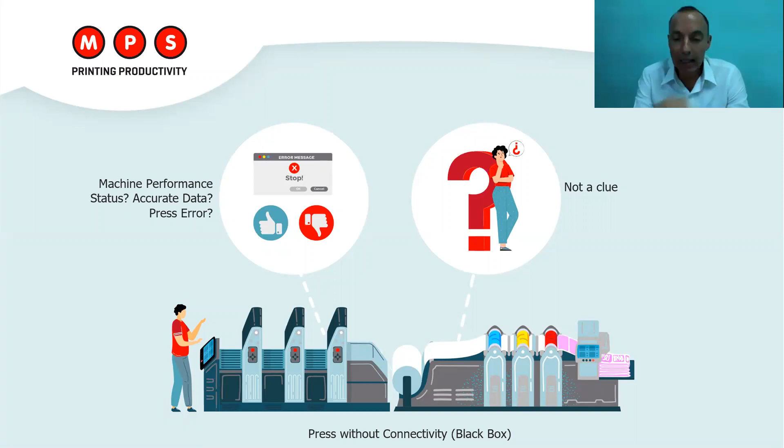So why is that? And it's even more important because for us, we've analyzed many situations and we found out that many machines are not running that well. The utilization rate is rather low. Sometimes the machine is just running for around 30% of the time, meaning 70% of the time they're sometimes not running.

That's huge. If you want to earn back your machine that is worth maybe 1 million euros, of course you want to run that machine continuously. You don't want to have those big breaks in between.

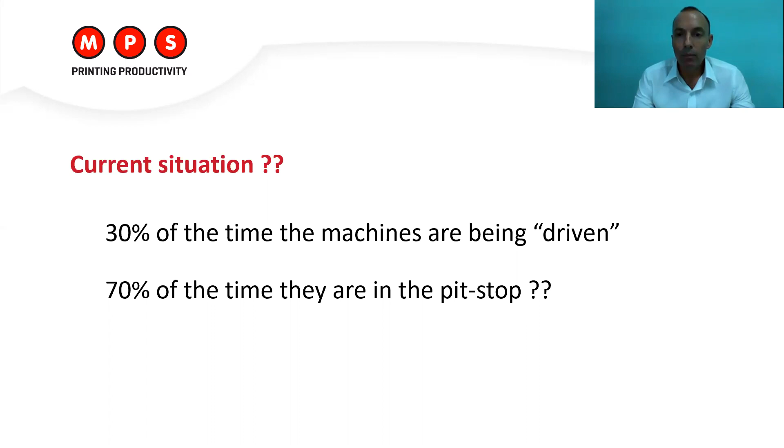So look at a typical sort of period of a machine. After installation, so you have the ramp up, you have all kinds of peaks and valleys, quite a bit of downtime. And what you actually want to have is a more consistent, desired operational bandwidth in which you want to run. So you need to know, why are those downtimes, those valleys here in these graphs?

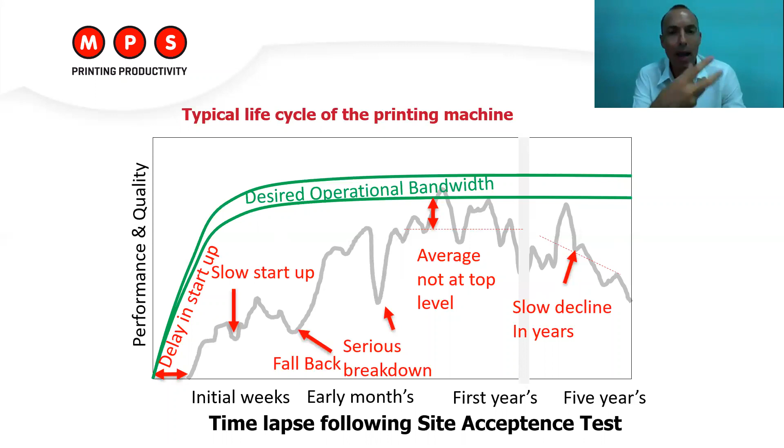What's happening at the moment? You don't have all that data. So if you want to be on par with the Formula One industry, we need to mirror the printing press.

We need to make a digital twin of the label press, in such a way that when we start with a setup, we need to get all the signals from the time you load the web in the unwinder, to the setup of the corona treatment, the DLAM, the turner bar, the print units, etc., until the rewinder.

You want to know what's going on, because you want to know how long those components are taking to set up, over time, so that you can better analyze uptimes, downtimes, good practices and bad practices.

This can be done by having these machines equipped with hundreds of sensors. These sensors will give obviously many more details than any operator can provide by manual input. Even if you have systems like CERM or Label Traxx, which are very good systems, they give information about what's happening around the machine, not what's happening in the machine. And you need to know what's happening in the machine if you want to increase your productivity. I'll give you more details about what kind of information you can get from this later on.

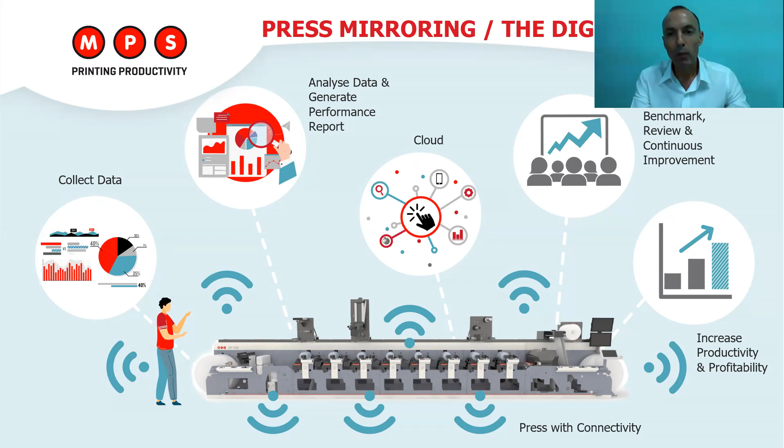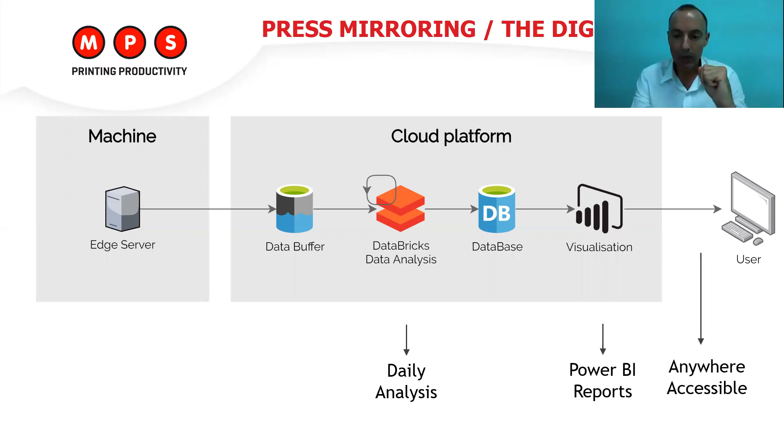So what we need is a machine with all kinds of sensors, a server that collects this data, and software that analyzes this data, so that you can get reports wherever you are in the world, as long as you have internet access. And it should really look good, the reports. Let me give you a few examples.

This is an example of an overview of a week's production. Those blue bars show you the jobs, and the height of the blue bar shows you the speed. It also shows how many meters you've produced, the waste produced, the waste percentage, the efficiency, and the utilization rate. This gives a very good bird's eye overview of what's happening in a week.

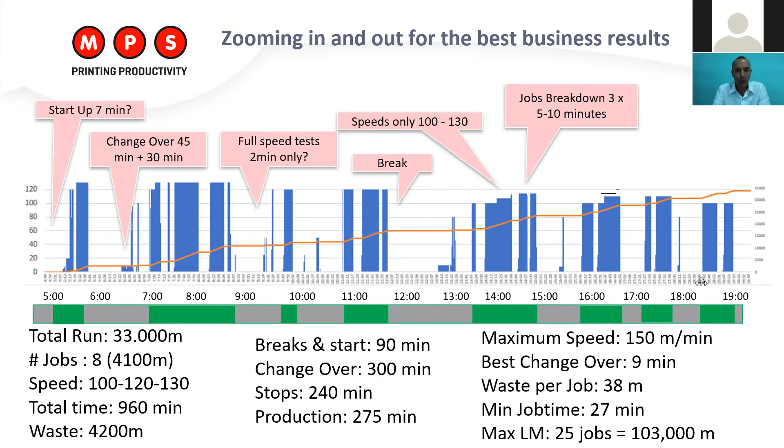But you can zoom in and sit with your team and ask, why are there gaps between those jobs? Why are you running one minute at 100 meters a minute, and other times running 120 or 150 meters a minute? What's going on? Maybe these are different substrates or different jobs, maybe fully understandable, maybe sometimes not.

Why do you sometimes wait for more than an hour between jobs? Is it because the ink was not available? Was it because the print sleeves were not done on time? Could be logistical issues. Maybe that is an area that needs improvement.

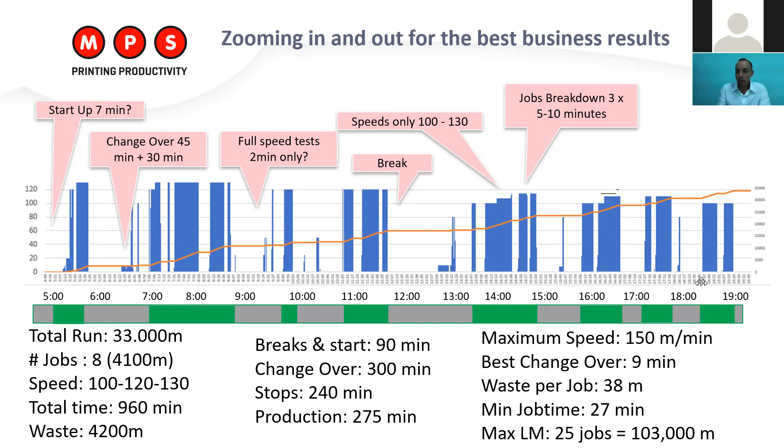If you can get these worst performers closer to the 1 minute, you could potentially save 8 to 9 minutes. That's insane. If you have 10 jobs a day, that's like 80 minutes a day. Even if it's just 1 hour a day, if you work 300 days a year, that's 300 hours saved—if you can run labels during those 300 hours, that's huge.

We have customers where we can prove that when you set up those different components more efficiently, you can really earn hundreds of thousands of euros extra per year. That's insane, and that's what we see when we analyze those environments.

The biggest gains can really be found in finding those gaps in productivity. It's not like comparing one machine with another and finding that one is a little bit better in the speed of the servo motors or whatever it is. Of course these things can be important, but it's the efficiency in operation that gives you huge gains—really hours a day and hundreds of hours per year, which gives you so much more time to run jobs and therefore more profits.

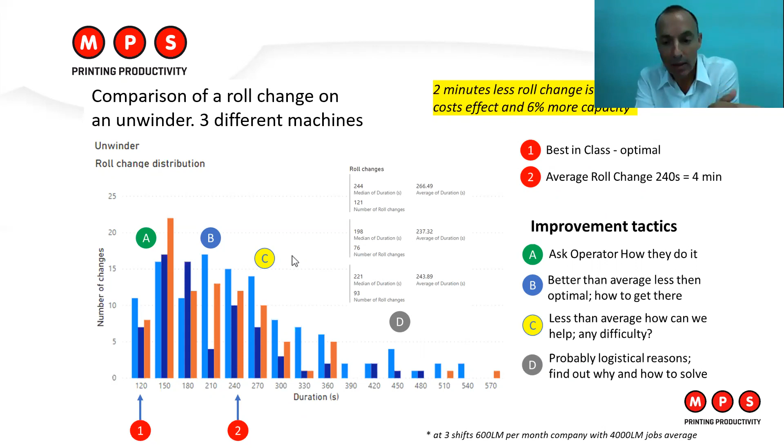So in a nutshell, this press mirroring, this creating a digital twin of your press, really gives you transparency in your production. Real-time transparency. At any time of the day, wherever you are, you know what's going on with your machines. Not because the operators are telling you that, but because the sensors are giving you this feedback continuously, streaming data.

Then you can benchmark your own operators or benchmark with industry leaders. That gives you the bottlenecks, the gaps, the areas where you need to improve, and also the areas we are really good at. That needs to lead to plans of action, and those plans give you improvements in productivity, all based on facts, on really accurate data, not subjective—this is all facts given by the sensors in the machine. So this leads to higher productivity and higher profit. Transparency, benchmarking, identifying bottlenecks, making plans for improvement, and getting higher productivity and profits.

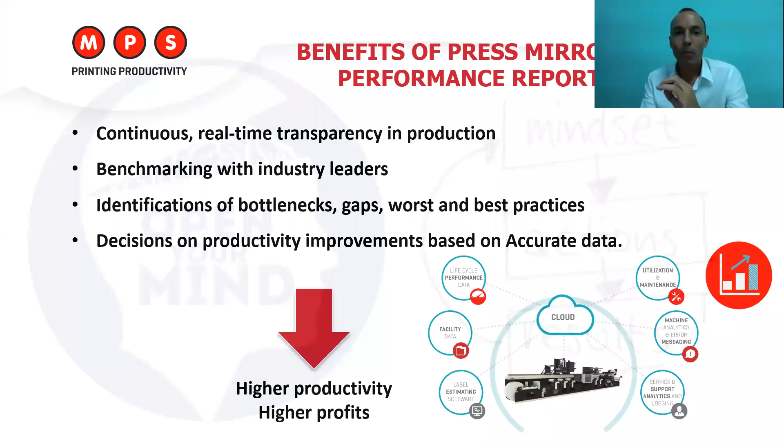Now this is really good, and I can tell you this is all available today. For MPS, all our machines are being delivered these days with these kinds of technologies, with sensors, with report capability. It's all there. And we also help our customers analyze the data. We have teams from different disciplines—data analysts, print instructors, engineers—who look at the reports and say, here there is room for improvement, and that can be done. We have sessions with our customers to discuss this.

Now it's all great, but it's very important that the printer, our customers, are really doing something with it. You can have great reports, but if you don't have a mindset and culture in the company of continuous improvement, then not too many positive things will happen. I really like what the Japanese are doing—this Kaizen concept, this concept of continuous improvement. This is really important to take the most out of these new technologies.

So press mirroring, the digital twin, it's all available today, and I think it's a must for companies to go into this. If you look at other industries—the self-driving car, planes which can go up and descend properly without pilot interventions, retailing, the medical sector—the Internet of Things is really growing very far. And if you look at our industry, the smart printing factory, not only the components of the machine are talking to each other and giving feedback, but you can go much further than this.